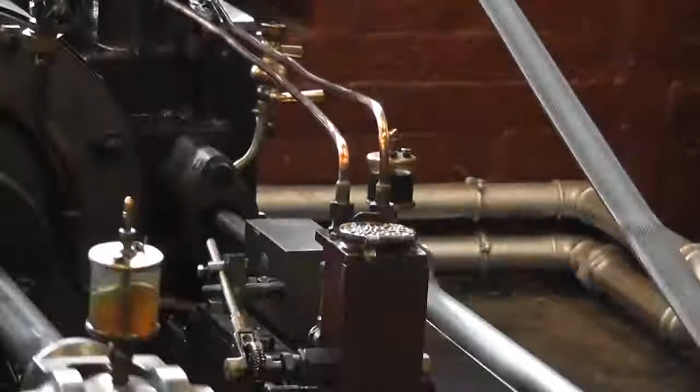And with that in mind, during the course of this year, I'm going to be visiting a couple of living museums: Beamish near Newcastle and the Black Country near Wolverhampton. At Beamish, I want to obtain some video and photographic reference material of the early steam engines and of the working locomotives which they have there.

And at the Black Country Museum, I have my eyes set on the working exhibit of the Newcomen 1712 atmospheric steam engine. I've already created some working CGI models of Newcomen's engine and also of the separate condensing engine built by James Watt in 1776, which I know I'm going to be using within the final production. So why don't we take a brief look?

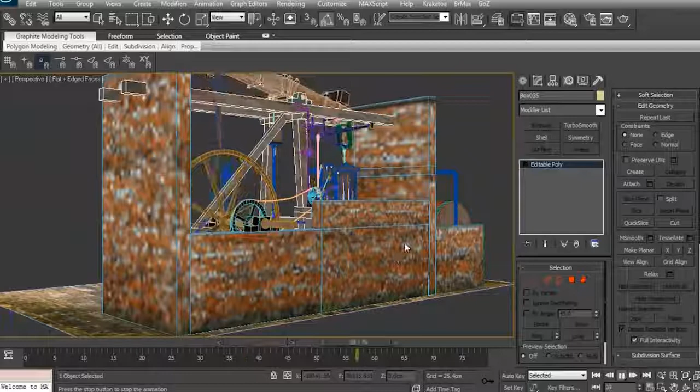Before the dawn of steam, man harnessed power from his own labours, livestock and from the elements. But the energy output would always be limited and restrictive. This was the age of reason, of enlightenment, a time when Britain began its unfettered journey towards leading the world in science, technology, trade, commerce, and even empire building.

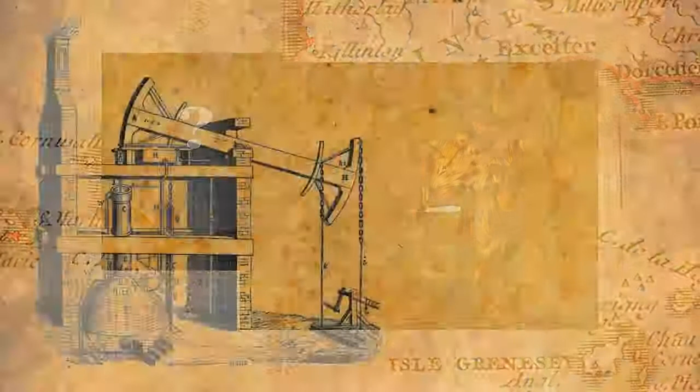Thomas Newcomen was an English inventor. Born in Dartmouth, Devon in 1664, he became an ironmonger by trade. And in 1712, Newcomen built his first atmospheric steam engine, which was used to pump water from the bottom of mines. The machine was a beam engine that condensed steam to create a vacuum.

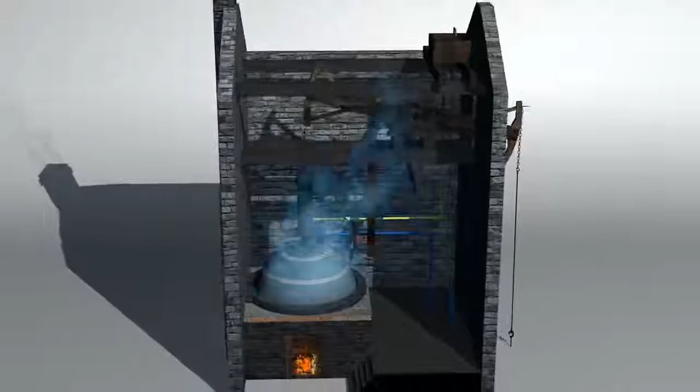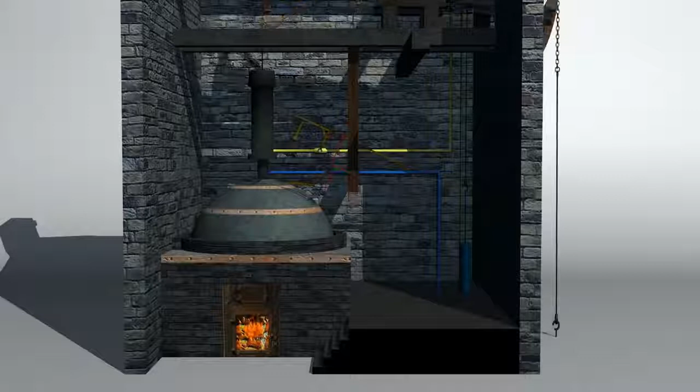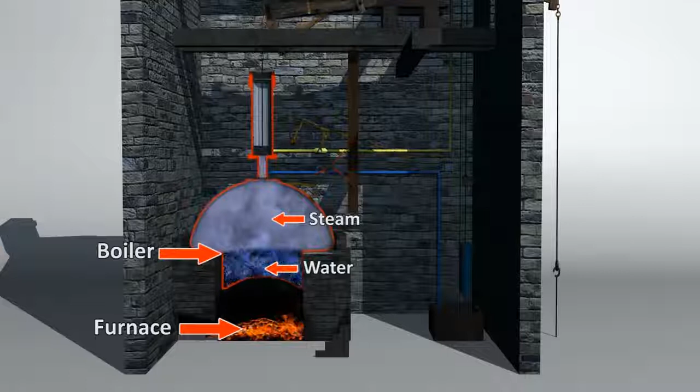That in turn allowed the atmospheric air pressure to push down on a piston which was contained within the condensing cylinder, which is about as clear as mud for most people. So let's take a look at this machine in cross section. Here we have the furnace, using coal as fuel to heat up the water inside the boiler. This generates steam, which then enters the condensing cylinder when a valve is opened.

The inlet valve is then closed and a jet of cold water is sprayed into the condensing cylinder. This causes the steam to rapidly cool and creates a vacuum. As the external pressure is now greater than that within the cylinder, it pushes the piston down and the cycle is then repeated.

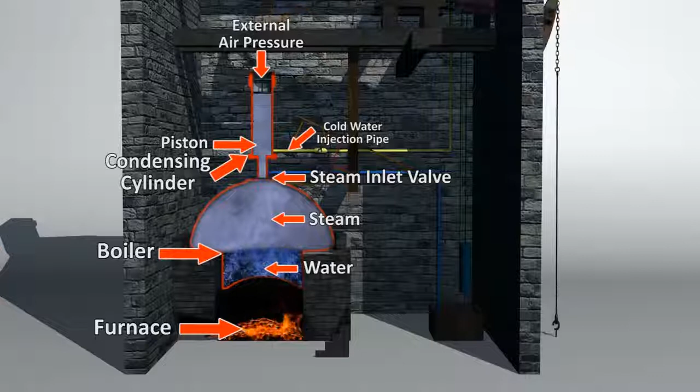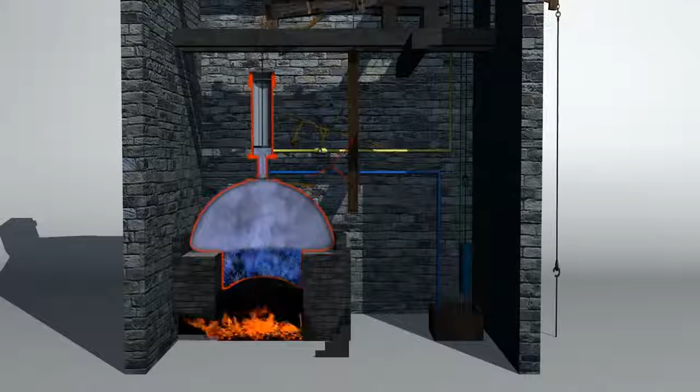In Newcomen's design, it isn't the steam which forces the piston back up to the top of the condensing cylinder. The beam is actually weighted more on the side of the pump connecting rod, and it's this weighting which pulls the piston back up as the cylinder's pressure is gradually equalised with the external atmospheric pressure.

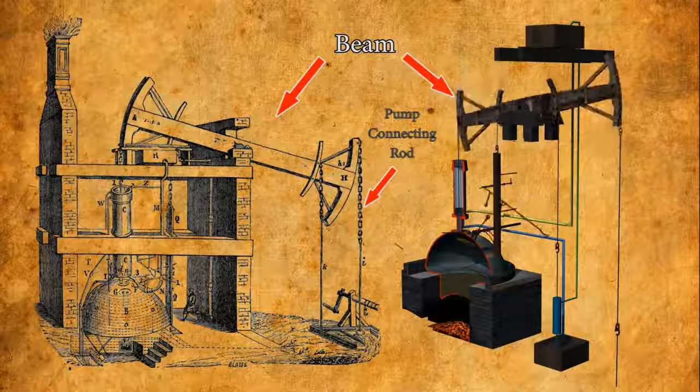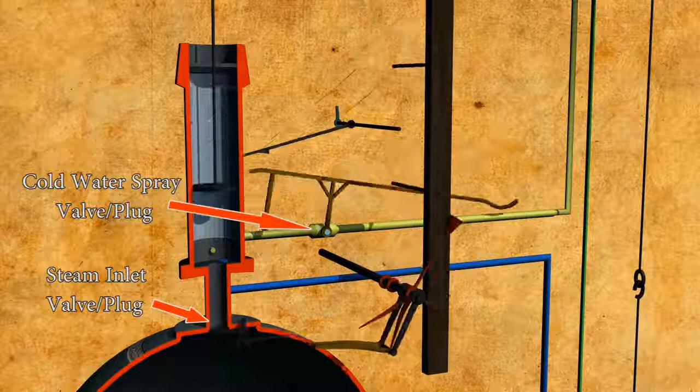In earlier designs, the valves, or plugs as they were then called, were manually operated by a plugman, but this cyclical action had to be accurate, and it was therefore more preferable to have this operation automated. Now it may look a little Heath Robinson, but with the introduction of a plug tree connected to the beam action, Newcomen was able to accomplish this task.

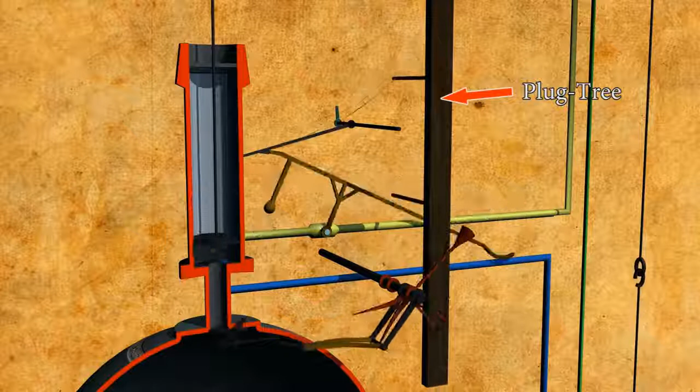James Watt was a Scottish inventor born in Greenock in 1736. It was whilst Watt was working as a mechanical engineer and instrument maker at the University of Glasgow that he was asked to repair a working model of Newcomen's steam engine. He came to realise that Newcomen's engine design was less than efficient. With every stroke, energy was being wasted as the condensing cylinder was being repeatedly heated and then cooled.

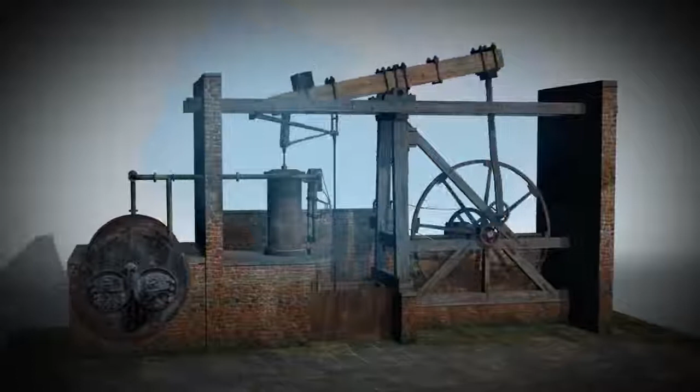Watt's solution to this problem was to build a steam engine that incorporated a separate condenser. Watt sporadically developed his engine between 1763 and 1775, and as we can already see, there's a little bit more to this than that of Newcomen's engine, so let's take a moment to examine its main features.

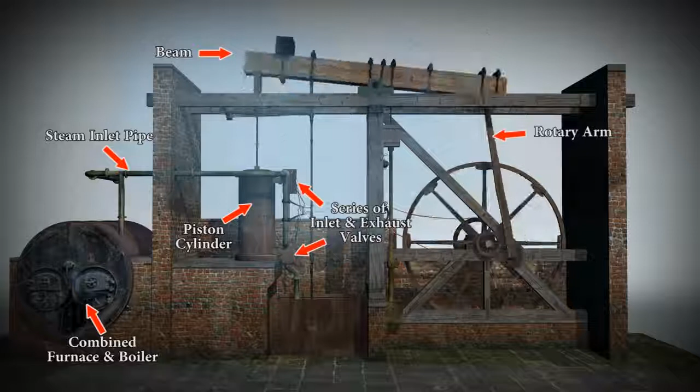It's the combined furnace and boiler that produces the steam, which is then transferred through the steam pipe to a series of inlet and exhaust valves, which in turn are connected to the piston cylinder. The piston is connected to the beam, which operates the rotary arm, one end of which is a static cog known as the planet, and that appears to rotate about another cog known as the sun, and it's these sun and planet gears which operate the flywheel. We also have a cold water tank and a hot water tank.

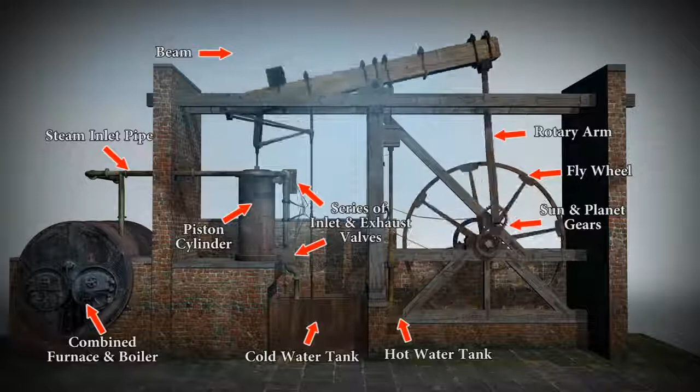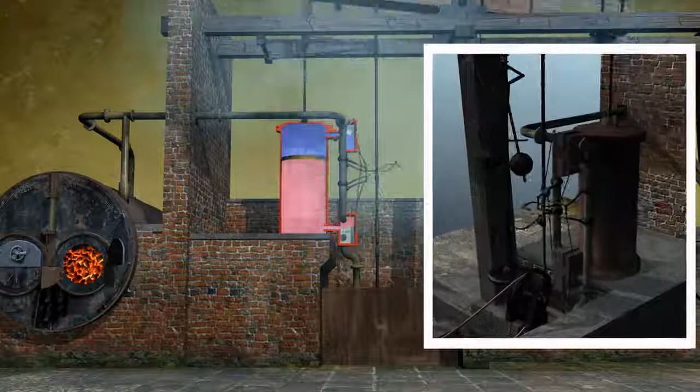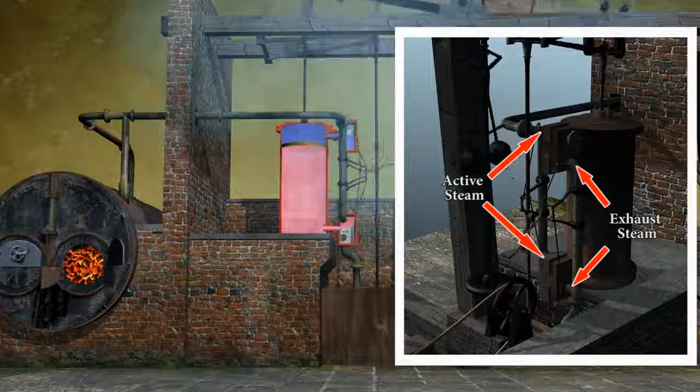In this cross section, we can see that Watt's engine is double acting. That's to say that steam enters the cylinder at each end alternately, forcing the piston up or down. This process is controlled by the engine's valve gear, shown here in this cutaway. Active steam alternately enters the valve systems at these points here, whilst the exhaust steam exits the system through these pipes, all of which is controlled by a plug tree or rod, which is again linked to the beam.

Here we can see the exhaust steam pipe leading into the cold water tank, in which are housed two cylinders. This is a separate condenser, and the other is a pump which extracts the condensate into the separate hot water tank, which then recirculates back to the boiler.